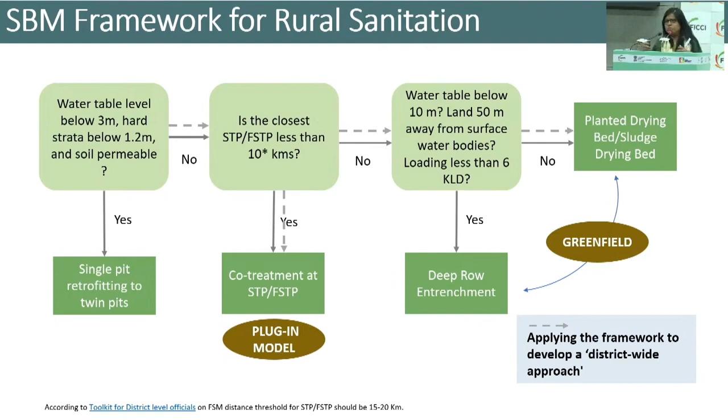The right side is the greenfield area where you have to build something new, while the left side is where you can have these tag-in or plug-in models where infrastructure already exists, so you can do it without spending too much on new infrastructure. When we were working in Odisha, there was this question: why do you need FSM in rural areas - twin pits exist, so there's no need for it. But we found that even in districts which claim there is no need, you still need a very clear strategy based on whether the water table is high or low. If you have a high water table, like we heard from our previous panelists, you still need FSM.

When there is a water table which is below, then you may go for twin pit. If there is dominance of twin pit, it's okay, they are considered safe if they are built properly. But we have found issues with the twin pits also.

High single pits can be retrofitted. But if there are septic tanks, you have to go for FSM. So that's the case of FSM. If you hear why rural needs FSM, you should just remember this slide.

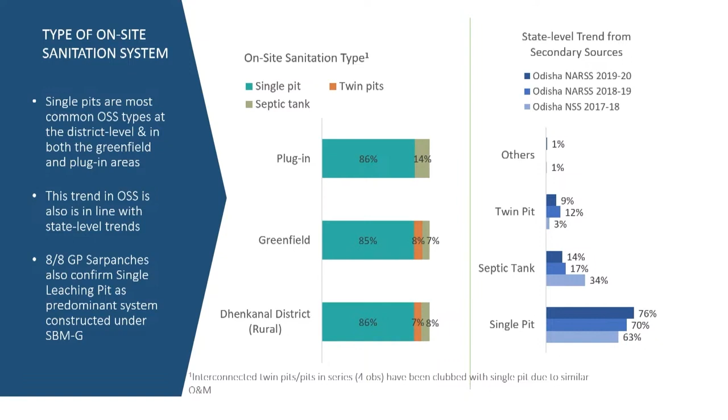It was not twin pit. So we challenged the government there that it is not twin pit, it's actually single pit, therefore FSM is required, followed by septic tanks and very few twin pits. Twin pits actually started growing only after 2018. Before that, it was always single pits being constructed in the fewer localities.

On retrofitting, not many people were aware and they did not want to spend money on that. So this survey was very important for the government to realize that this whole idea of 'rural mein zarurat nahi hai' (there's no need in rural areas) was actually completely challenged.

On desludging providers, we found that municipal service providers and private cesspool operators were there. People were relying heavily on manual labor, which is of course a bad practice, but still we found poor people were doing that. And in any case it cost a lot too - it wasn't actually feasible.

And which are the retrofitting and greenfield areas, where you have to either go for retrofitting or have new FSTP, or low cost or affordable, where it won't be viable financially for the truck to go so far, even considering the topography. So all that we did.

Also seeing in our case, in our urban FSM, how the utilization of the plant was, what was the average. We need to do all the calculations - you can't just go and build something without taking a full-fledged picture. So we did all that, and our decision was that if you have to estimate spare capacity...

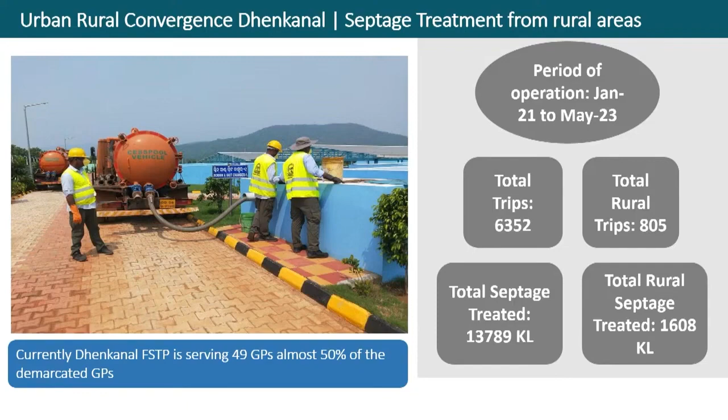And I'm glad to share - this is May '23 data, so since then a lot must have changed - but total trips from rural areas have increased. The total rural septage was 1608 KL, which was huge because there was a lot of work done on the demand side, awareness building, and all that.

And this initiative has gotten a lot of recognition. The Dhenkanal municipality has also gotten the FICCI award - we at CPR got it last December - and there were many attractions from the government, even at the national level. Lots of state governments have already visited to study this model.

Soon after that, we scaled up this model because it was picked up and got a lot of traction. So with UNICEF support, this was taken up by us with the government. What is an enabler is that you need very strong political will at the state level, and we gladly had that - the chief minister and both ministries worked together with regular reviews and all that.

One important thing happened - for the first time in the history of India, as far as I know, any waste management project or program where SBM Grameen - or if not SBM earlier - I did not come across any program which funded SBM Urban. So SBM Grameen funds are being utilized by SBM Urban in Odisha to upgrade their system, because now rural sludge is coming, so you have to improve the fleet and add more drying beds to your FSTP. So all that is being done.

So this was a very unique model. And when we were here, we presented this to Vini Mahajan, Madam Secretary, and she went there also from the Ministry to see this in Odisha.

So just like how you decentralize the nature-based low technology solution O&M by the community - Odisha is also one state which is employing self-help groups to take up O&M. So it's not a private thing - it's very low cost and very easily operatable.

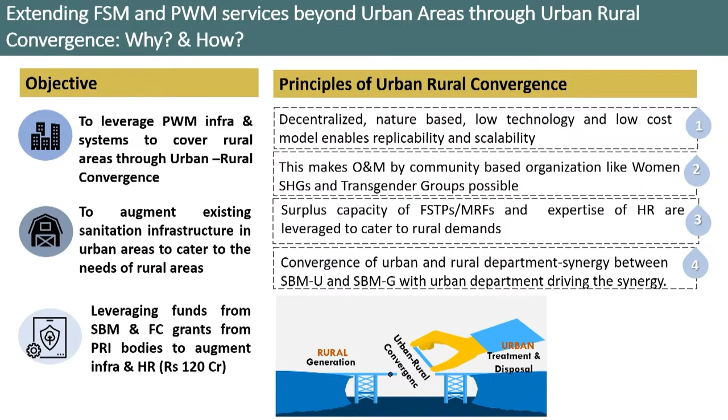And there are surplus capacities of FSTPs and MRFs - I forgot to mention that in the second phase, it was not just FSM but also MRFs. But since this session is on FSM, I'm only focusing there. This was about how rural waste was also being catered to here, so I'm not going into detail.

Just that you need to have a proper model based on who are your providers, where the call center is, how the call center will work, how complaints from panchayats will come, and whether the call center will cater to it with a register. So the data has been captured because they are very proficient and skilled call centers, mobilizing vehicle movement - where to go, where's the demand, and whom to cater to.

And what is also happening is that a strong monitoring and evaluation system is generated. Safa app is a kind of application used by Ganjam, because that was very specific to Ganjam at that point of time.

When we were scaling up from Dhenkanal to other areas in Ganjam, we found they were using the Safa app to monitor, but that was only for urban. Through this program, we integrated rural also, so all rural demands are coming in and being properly managed. Dashboards are generated where secretaries and departments can see. There's a lot of focus on monitoring because otherwise every hard work can just fall through the cracks with no data.

If somebody wants to know how much sludge these plants are treating, we did a lot of capacity building and awareness generation. Some very innovative interactive communication materials in English and Odia are available on how Gram Panchayats have to manage fecal sludge and what options they have, in very lucid, comprehensible language so people can understand. A lot of awareness happened.

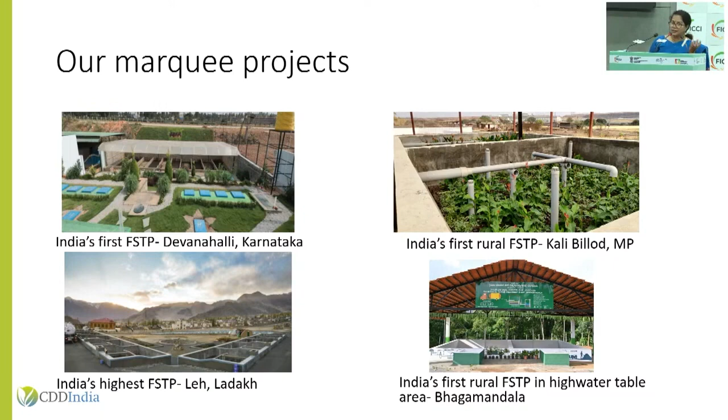Before I start, I would like to highlight some of our marquee projects which were instrumental in us learning new things and trying to take these learnings to scale. Whether it was India's first urban-level town FSTP, the highest FSTP, or the first rural FSTP, we also had a unique case of a village at the confluence of the Kaveri, with a high water table and yearly flooding, where we had to set up an FSTP. These were challenging, with a lot of problems and blockages along the way.

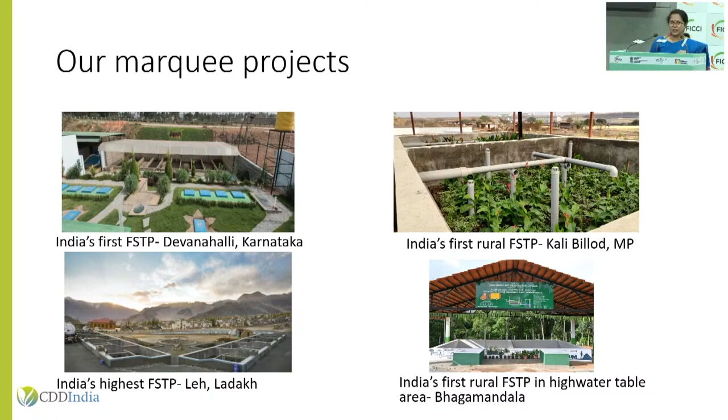But these have also given us a lot of insights into what can be improved as we move ahead, so I'll try to focus on those things. I won't delve too much into why this is really important, or why we speak so much about FSM or about grey water today.

This is not just the issue of Swachh Bharat Mission as a scheme or government program, but links to a larger issue. We are speaking of water stress and water security issues today, we are talking about climate change. And what we are doing at a small level is also going to contribute in a positive way to the larger issues that we are facing as a planet.

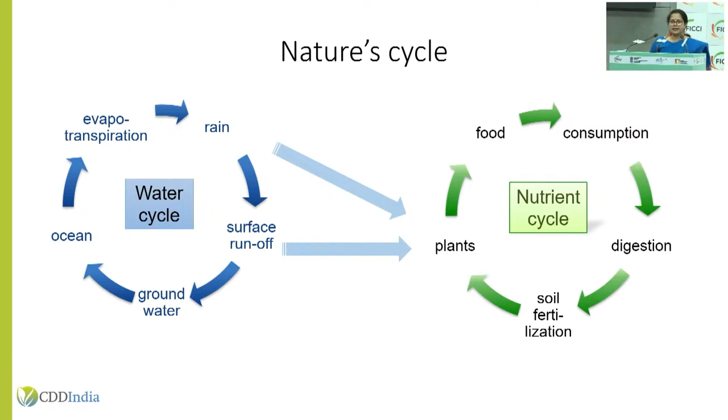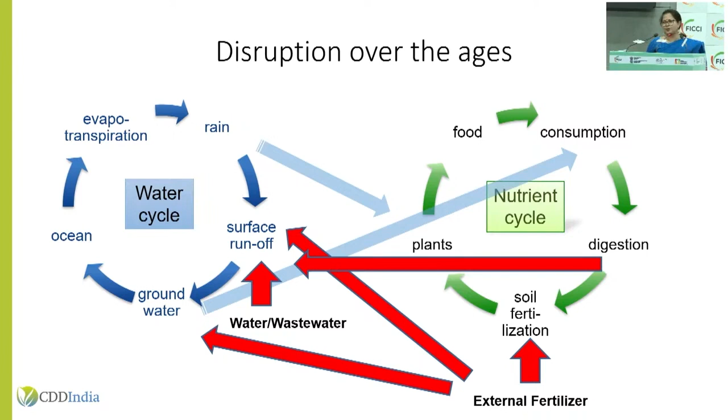We did have a water and nutrient cycle which over the years we have disrupted for all the wrong reasons. We started abusing our surface water bodies, discharging a lot of untreated wastewater into it. We started going for chemical fertilizers instead of organic ones, and all those runoffs are also ending up in our water bodies. Since the surface water bodies are so polluted, we are then sucking out water from the underground aquifers, which has added not only to stress of water availability but also to a lot of pollution.

That's the reason we need to be so much on our toes to tackle this issue. We are not speaking of an issue just at a village or district level, but at a country level, so the scale is huge. To achieve this kind of scale, even a room full of people wouldn't have been sufficient. We need many more people from across districts, across states, and across all stakeholder groups to work with us.

So I'll try to put these into 4-5 questions we started asking ourselves: what should be our strategy, how should we go about it, who should be the people doing it, and when. The when is also equally necessary, because this was in discussion with the Rural Drinking Water and Sanitation Department in Karnataka, and for them the targets were also equally important. I'm sure the government officials sitting here would agree with me.

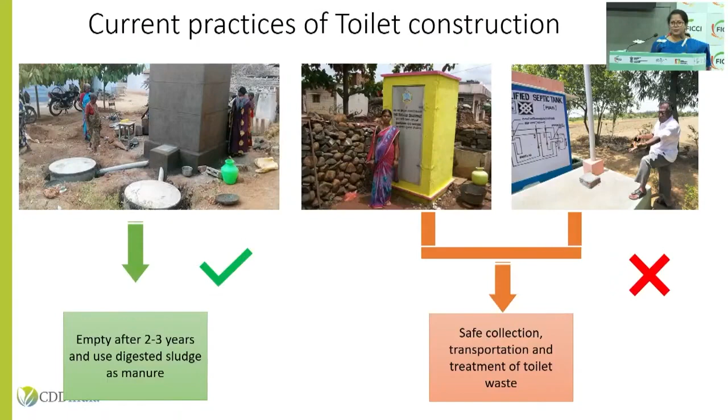I'll go one by one and make it as quick as possible. I'll not delve too much into why FSM is required - of course our toilets have not been constructed the way they had to be, and this is what we had been facing for some time. I can't say that now, luckily, because there have been a lot of efforts across many states. We have Odisha showing us the way, not only in technical issues but also administrative, finance, and social impacts.

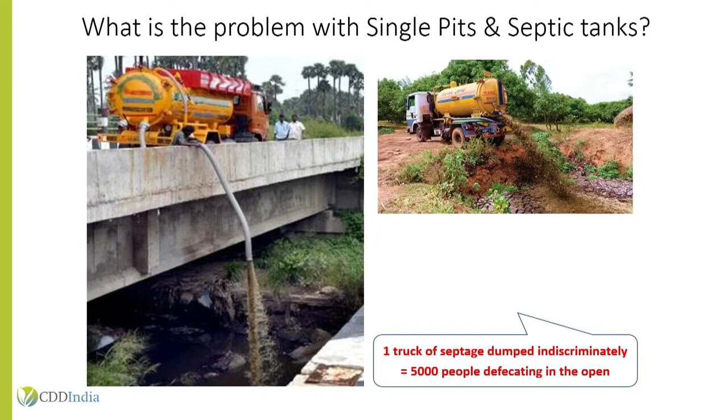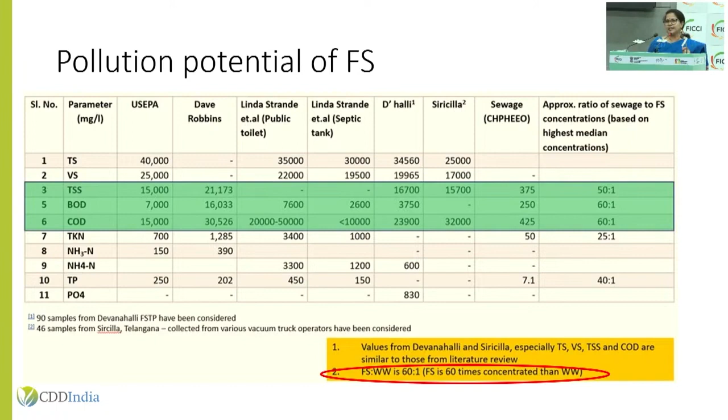This was just to create an image of the scale of pollution we cause by discharging untreated human waste or fecal sludge into water bodies - equal to 5,000 people going out in the open, relieving themselves. This is also to highlight why we delve so much into fecal sludge because of the pollution potential. You can focus on the last column which shows how many times more polluting it is than normal sewage or even grey water.

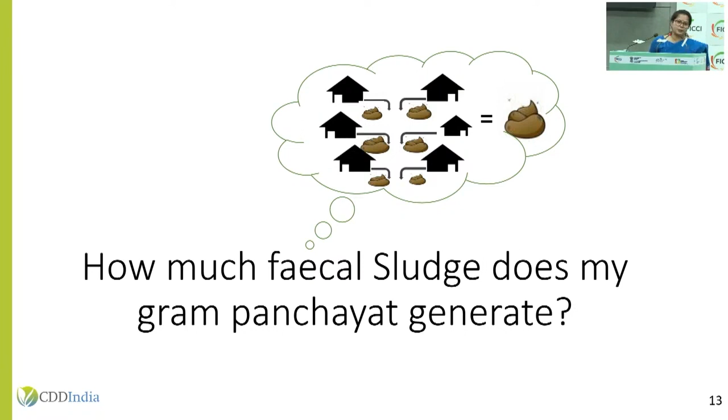Our first question was, when we go at a Gram Panchayat level, when we started with the first cluster, is it really required at a Gram Panchayat level? Not really, because we know we don't get so much sludge - the practices are quite different from the urban counterparts. That's why we had to do exercises using scientific projection methods, whether in terms of population or desludging practices themselves.

Over the first few projects we were convinced that nothing matters as much as practical learnings. We might have scientific ways of assessing capacities and modules, but what eventually makes it work or break is how it is maintained and managed, and it has to be as simple as possible. The simpler the system, the better it is managed - that was the ethos we really followed.

One of our ex-commissioner's favorite statements used to be: just make it idiot-proof. Even if an idiot is put on a job - I know it sounds a little regressive - anyone who just doesn't know anything can also not mess up the system. So our effort was to keep it as simple as possible. Yeah, approaches were different compared to the urban counterparts.

Firstly, we saw across our different geographies and geoclimatic conditions, the kind of developments in rural areas - the old containment systems were large, as large as a room size in some places we've seen. So they really didn't worry about emptying.

When we would ask them why it's room-sized and the opening would have been given in the hall, right in the middle of the house, they'll say, no, we never worried because we didn't empty it. So, of course, in the recent toilets that have been constructed, they are feeling the pinch after the first 3 or 4 years because they need emptying.

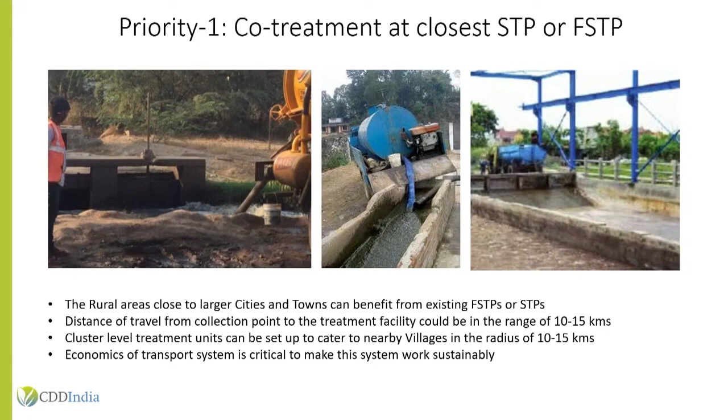So co-treatment as the first option at the nearest either urban STP or FSTP. But also we help them understand in what condition the STP should be used for co-treatment based on its technology, its current usage, its current utilization percentage, and the distance from the villages.

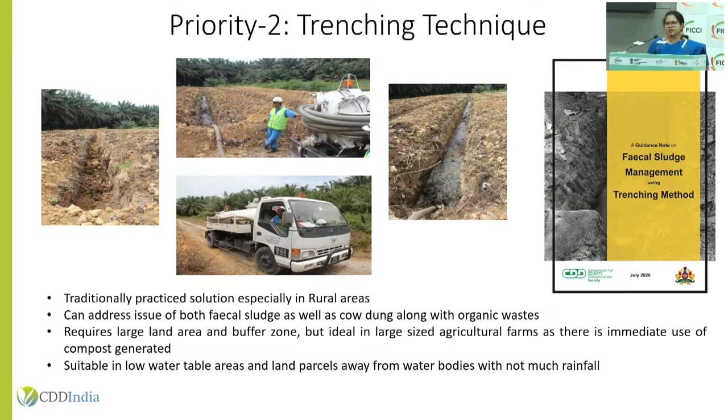Second, of course, was trenching. But instead of the regular conventional trenching where people had challenges finding the ideal kind of site, we said, why don't you do an alternate trenching? We made a guideline saying that you take a 30 by 20 meter plot, and in that you can do alternate trenching by making trapezoidal rectangular trenches instead of the row trenches. So that is another easy option we provided.

In terms of technologies, over the past decade we've seen many newer technologies being implemented in fecal sludge treatment as well. But we try to bucket them, for ease of understanding, into active and passive ones. Active ones are usually conventionally, as Sir had earlier said, highly engineered. They would be suitable maybe in certain places where the ULBs or the PRIs can afford them, and where there's a lack of space availability, and there is enough electricity and enough human resources to manage it.

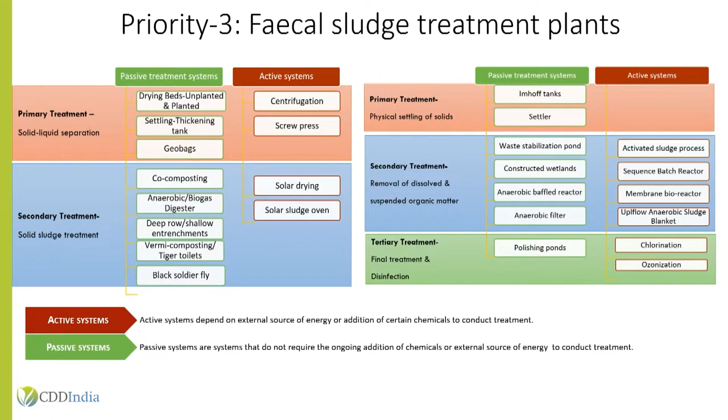So in these cases, maybe the conventional could be tried, but in rural areas, largely we are going for passive systems. These are nature-based systems which require very little maintenance, and if you site them in the solid waste treatment facility area itself, it becomes easier. That's how we've tried to reduce operating costs also in some cases, by utilizing the same team and training them to operate these plants.

As per the guidelines, we have stuck to the first two largely across the state, whether it's planted drying beds or unplanted drying beds. We have also given certain guidelines to the district officials along with the training saying if you have to select a technology, please don't be limited to just the ones that are already running on ground. Because the usual government statement would be that I want to do something that's already working, I don't want to take the risk of something new.

So in that case, it is okay to take new risks with new technologies, but certain questions should be answered: what is my intent for treatment? Is there any end use or reuse option that I have available? What are the resources available with me? And lastly, what is the input quality and quantity? That also matters even in fecal sludge treatment.

I'll just quickly go through the reuse potential, because our general assumption is that when it's rural, you can just use it for agriculture or horticulture or whatever. But we've also seen certain villages, especially peri-urban ones, which didn't have much uptake for reuse. They came back saying, no, we don't really want to do this because it's adding a burden on us to figure out what to do with the treated sludge and the additional water being generated. Though these are small quantities, they could largely use it in their own landscaping. But again, it set us thinking that we should not limit reuse to just a certain kind in rural areas. So next is the how.

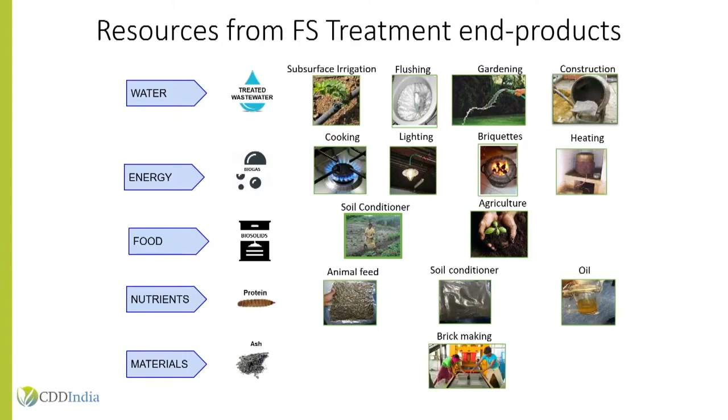Really, how did we go about? We have just 2 minutes for you. I'm so, 2 minutes and we're done.

Don't worry, so as to the how, I just wanted to say that the state has come a long way, whether it's in terms of policy formulation, or the guideline documents we prepared. The general tendency in scale-up is to just copy whatever is being done and replicate it. We said no, this will not work. We even prepared technical workbooks, template documents, and trained engineers. Luckily in Karnataka, we had the Panchayat Raj department having responsibility under one official for both NREGA as well as SBM.

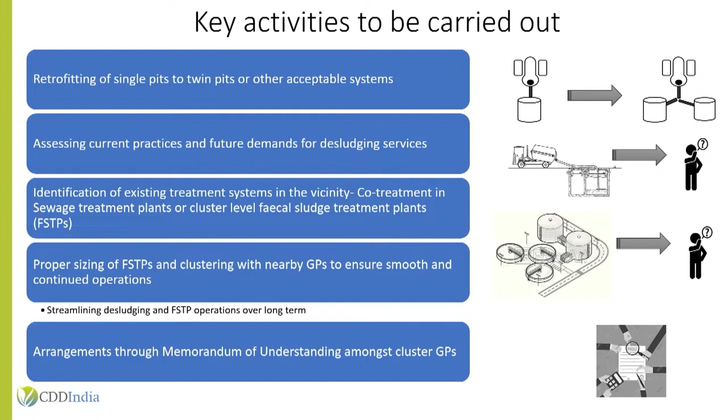That worked in our favor because we could sit and plan out many activities where there could be convergence of funds, and that's how work happened faster. In terms of technical support, training and capacity building, we provided about 3 years of service in technical handholding, which we felt was essential. You can't just suddenly provide a service and exit out of it. So we tapered it down — first we were full-fledged, did pilots, did training, provided a 2-3 person team just to help them out. And now we've exited, and the state is going ahead with implementation.

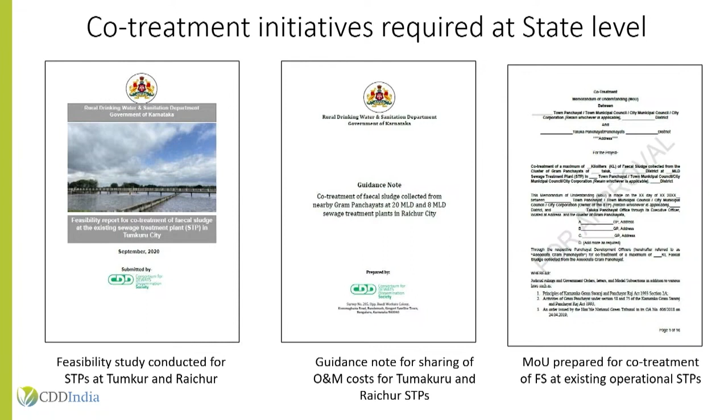So making it up and running, there are a lot of excellent examples we've discussed — using SHGs, using the existing solid waste management facility team and training them to operate these FSTPs. That's how we've been able to scale up. We've used a lot of GIS maps to identify locations and cluster the villages around. A lot has been done at the state level, and then it's been passed on to the district level authorities to take it up from there.

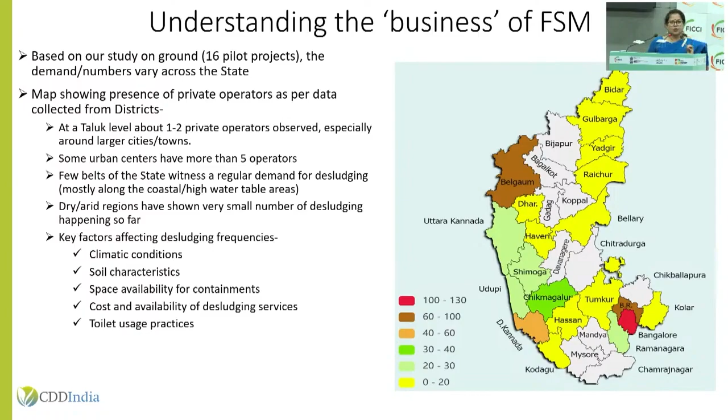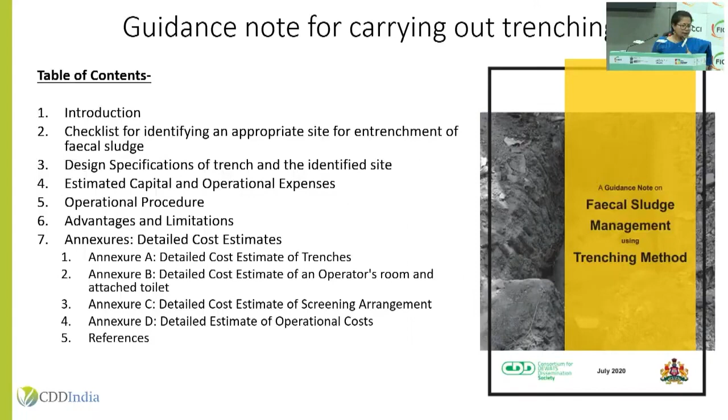One important challenge we still face is understanding the business of FSM — and when I speak of business, it's about the desludging business. We're trying to address not just government vehicles, how to manage and run them and at least break even if not make profits, but also small-time private desludging operators and how to bring them into the fold. Many other states have used systems of licensing and empaneling, and that process is still on in Karnataka. We intend to take that up and make it a more well-formed system.

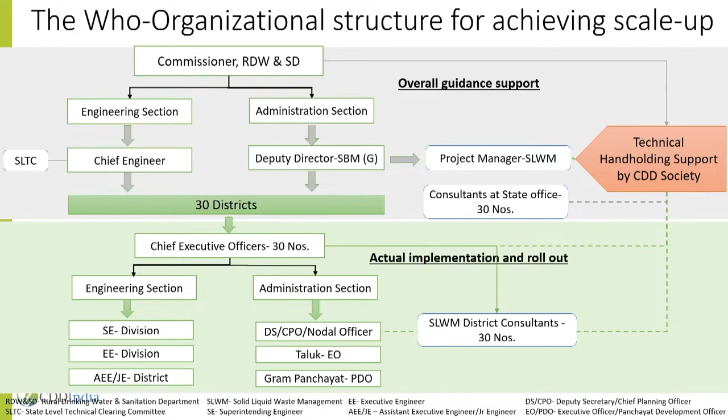The state team also developed a panel of people from media organizations and got videos done from the district levels itself. Simple Gram Panchayat teams came and prepared videos, and there was a lot of pride in them knowing their messages were going out to everyone.

There are a lot of aspirations to do whatever the urban counterparts are doing. We've had many villages on the peripheries of large cities who come to us and say, we had money, we put up a UGD, now please help us with a treatment system, but we don't have money for it. So we're trying to figure out ways to even work with such situations, because even they need a solution at the end of the day. So that's about it. I hope I've not exceeded my time, and happy to take any questions either now or later on. Thank you very much, everyone.

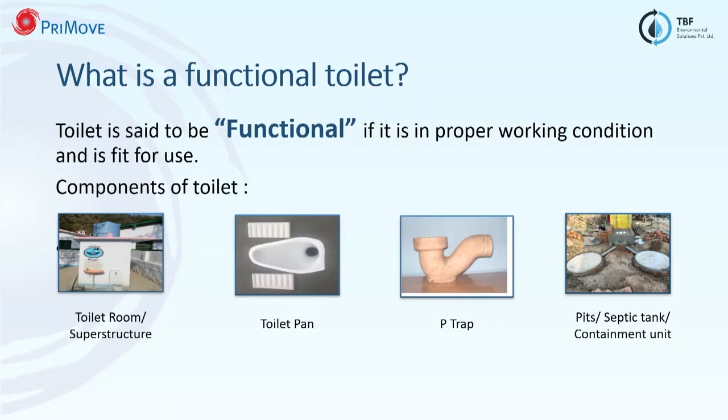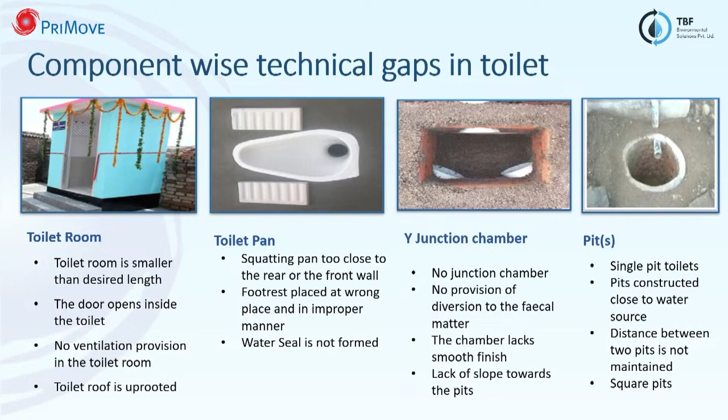We have spoken enough about toilets and their functionality. The thing is, in the haste of achieving the ODF free status, we undertook toilet construction at a massive scale and missed out a few points. And that is why we require retrofitting at a higher level than that would have been expected. There are multiple components in the toilet that are found to be non-functional or not functioning up to the mark because of certain points that either were missed, as sir said, that the trainings took place later and the program had proceeded by that time, or generally lack of technical know-how, or trying to find a solution that is like one fits all. We know that our nation is very diverse, and therefore we cannot have one fits all kind of a solution. So yes, there are issues with the toilet rooms, pits, and all the components of a toilet.

I wouldn't want to focus on all the components, but pits is one thing that I would like to take up. Usually there are single pit toilets that have been built up at multiple locations. Also, there are single pit toilets that are built in locations where the soils have low permeability or the water table is really high. In such considerations, when the permeability of soil is low, the water does not get out and percolation does not happen, so the decomposition time is really high. In cases where the water table is really high, there is a good chance of contamination.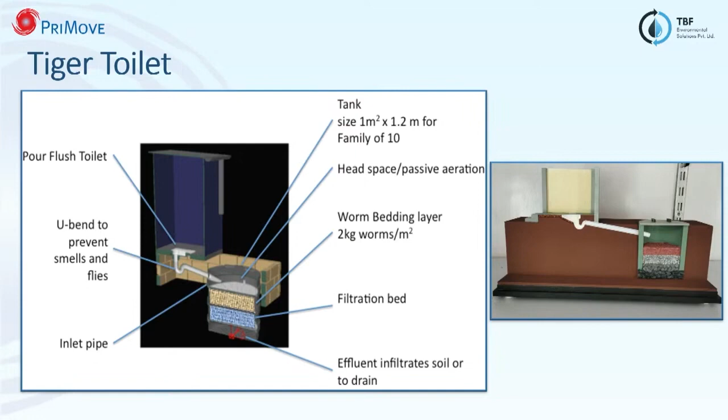So there is one option called tiger toilet, which can be utilized in such cases, where earthworms are utilized for digestion of fecal sludge. As you can see in the picture here, down there we provide a gravel layer above which a biomedia is placed, which is basically a mixture of coconut husk and cow dung. On top of that, earthworms, a specific species known as tiger worms, are loaded. The fecal matter falls in the center of the pit, wherein the earthworms come, consume the fecal matter, and as they move aside, they convert the fecal matter into vermicompost, which is then accumulated along the periphery of the tank. So at any point of time, we really do not have to deal with the fecal sludge, and also we do not have to wait for the whole tank to be emptied. Also, if there is a water table which is really high, the water that gets down the gravel layer is treated, and there is very low to nominal risk of water contamination. In case the soil is not permeable or semi-permeable, then we can always channelize the water outside to nearby drains, whatever is possible. So this is just a diagram and some of the positive points of having tiger toilets.

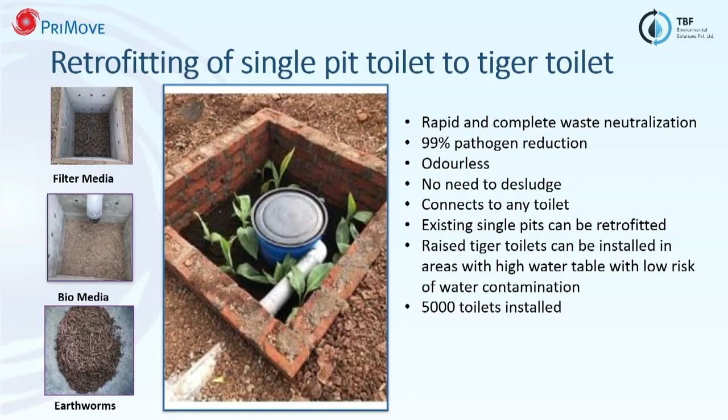These are found to be very useful in remote areas where there are also multiple excavations, or sending teams for multiple times for construction is not really possible. In those locations, we tried having tiger toilets, which are performing really well. Also, we have tried some raised tiger toilets in areas which have high water table. So such are the locations where tiger toilets can be used.

Now, septic tanks - I would like to focus a bit on the points that we should take care of. People have really gone far with their imagination in construction of septic tanks. The septic tanks everywhere are not really watertight structures. They have honeycombed walls, or not really a base slab, or things like that. And then you really do not know what to do about it. So the first thing is we really need to retrofit it. When we call something a septic tank, we have to have a septic tank which is watertight as per the design of IS 2470. And then if that is ensured, at least we can desludge it and have a septic management system.

If we have something in between a septic tank and a twin pit toilet, we'll never figure out how to go about it. So that is one thing that I would want to focus on here.

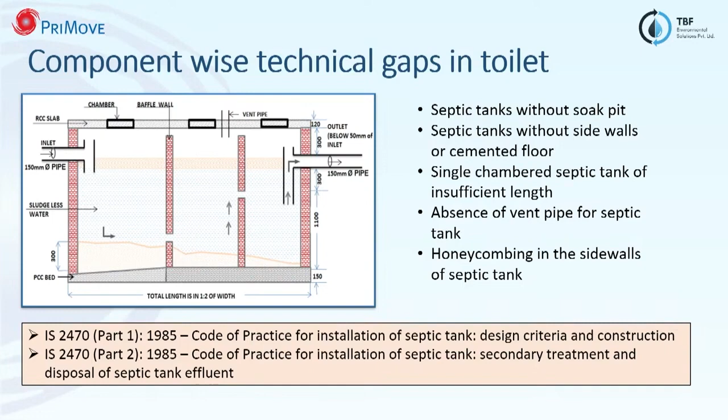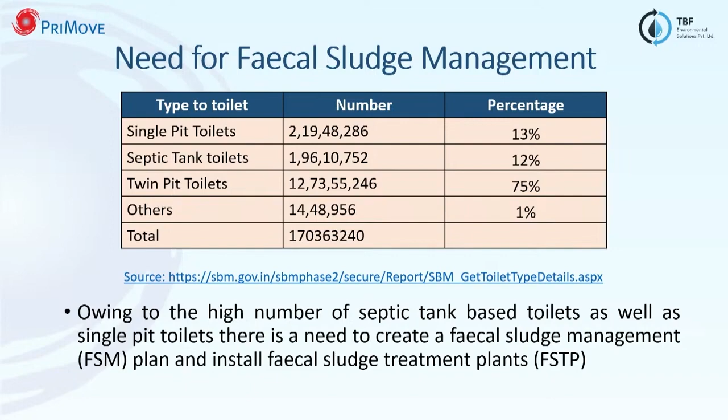Now, even if you look at the percentages—this is data I took yesterday from the Swachh Bharat Mission dashboard—the percentage might look really small, that only 12 to 13% of toilets are single pit and septic tank. However, if you look at the numbers, they are really high. So that gives us, as Anju ma'am was mentioning, a definite need for a fecal sludge management system and fecal sludge treatment plants.

What fecal sludge management is has been sufficiently discussed, so I wouldn't want to repeat it. There are certain things about the fecal sludge management chain, however, which have not been given enough focus.

Firstly, the containment unit. If we are saying the containment unit, it has to contain things sufficiently so that it can be desludged at least—the material should be pumpable at least.

Then, when we come to emptying and transportation, this business is not really organized. There are a few malpractices going on, and we need some kind of licensing, like ma'am spoke about, that needs to be done. This needs to be converted into an organized industry so that both the people involved in the industry and the household owners can benefit from it.

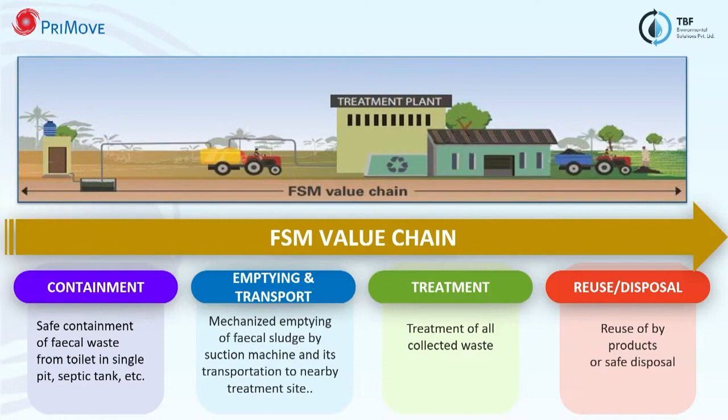About the treatment, there is quite a need for treatment. And last but not the least, people are not really aware of what can be done with the byproducts created from the treatment.

So these are some of the issues. People are not aware about septic tanks—as ma'am mentioned, now they are somewhere figuring out that yes, it needs desludging, or sometimes it is used in such a way that it will never need desludging. But either way, it is a wrong practice. So massive IEC on this needs to be undertaken.

Lack of services, lack of treatment facilities, and lack of knowledge about what can be done with byproducts are major challenges that need IEC, but IEC alone is not sufficient. We also need infrastructure so that we start walking from both ends, so that somewhere the paths will meet, with a positive hope that we will meet up.

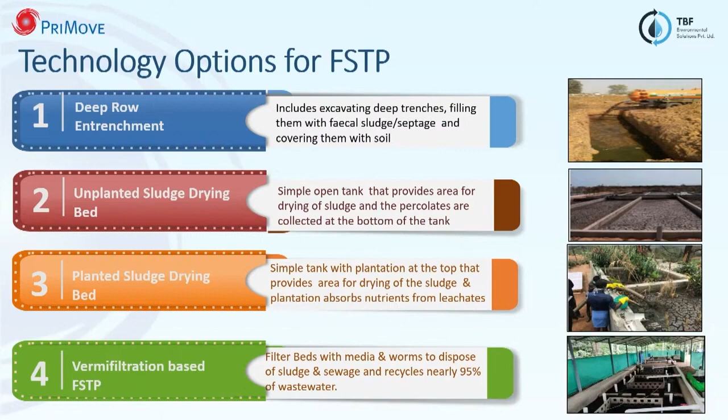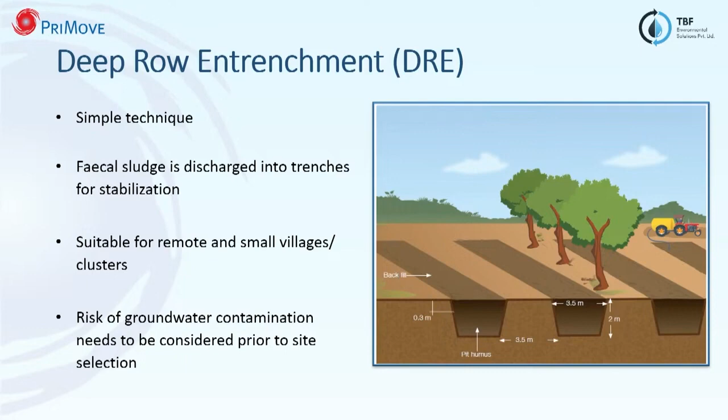So these are simple technologies that can be used. Most of them have already been discussed by both speakers earlier. I would just like to focus on some points: deep row entrenchment, while typically very simple, is also area intensive. And if the land available is not selected properly, it can have a risk of water contamination, just like the pit system does when the water table is high.

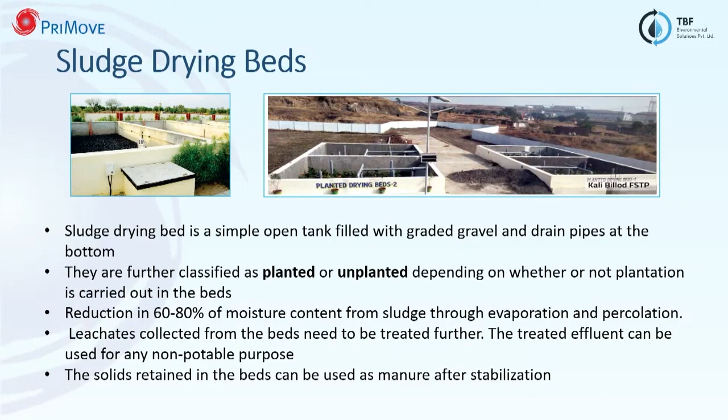Then coming to sludge drying beds—these specifically provide solid-liquid separation, and then both the leachate and the sludge need to be stabilized. The leachate needs to be treated, and then both byproducts can be used, as the treated effluent can be used for non-potable purposes like agriculture, landscaping, or others. If there is a chemical industry nearby, maybe that can be utilized, and the manure can be used in farms.

Now, coming to vermi-based treatment, basically it uses earthworms and a consortium of earthworms and other bacteria. It's known that the gut of an earthworm contains quite a variety of bacteria, and it is not restricted that if an earthworm is working, the other microbes won't work. So it is the whole ecosystem in the tank that works on the fecal matter, and as a result the fecal matter is digested, stabilized, and vermicompost is formed out of it.

But since we are putting the fecal matter in to be consumed by earthworms, one thing about earthworms is that they cannot sustain flash loading. Therefore, if anaerobic digestion is given prior to that, the flash loading is avoided. Earlier in some presentation we saw that the range of fecal sludge is from 10K to 50K—that is quite a lot of variation for any microbe to digest, and specifically for earthworms. They are really efficient, but they have their own concerns. So long as we are very friendly with them, they are very friendly with us. But we have to make sure they are not flash loaded.

And then the organics are converted into vermicompost. Unlike planted or unplanted sludge drying beds, there is no separate time required for sludge digestion or stabilization. The process goes on continuously. The vermicompost is usually accumulated along the periphery of the tank, whereas the fecal sludge is discharged at the center of the tank. So with simple safety gear like gloves and mask, any person can just take off the vermicompost and the tank is good to go. So there's no need to completely desludge the tank at any point of time.

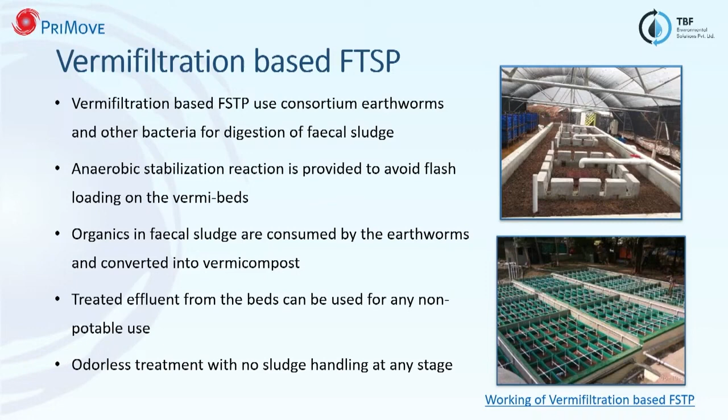It is then loaded over a vermibed filter. This typical one is of the Tiger biofilters, which is a patented technology formed by Primove and is now implemented by TBF Environmental Solutions. So TBF bed 1 is the place where fecal sludge is discharged. The liquid components go down the gravel media, and the solids are retained at the upper portion. The composition is very similar to that of a Tiger toilet digester.

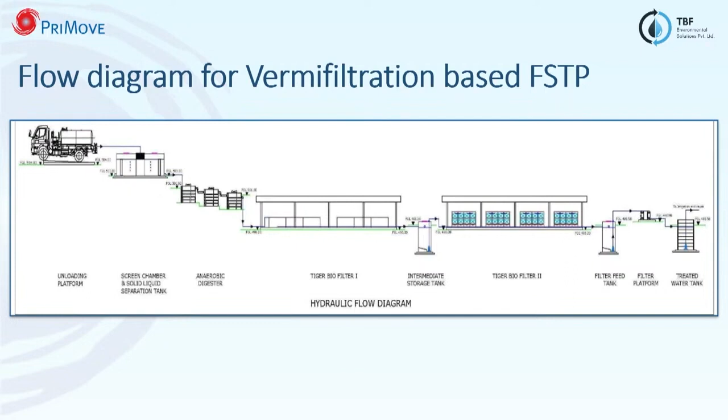At the lower half we have gravel media, then biomedia loaded with earthworms. So the liquid portion passes through the gravel media and is collected in a tank. It is then loaded over the TBF2 tank, where again the earthworms act upon the organics and clear water is discharged out. It is then polished and disinfected, and this water can be used for any non-potable purpose. In both tanks, we get vermicompost at the periphery of the tank, which can be used for agricultural purposes.

We also have seen the importance of co-treatment, and one such co-treatment plant is working in Malkapur in Satara district of Maharashtra, where the initial STP was constructed based on MBBR technology. The town has quite a lot of septic tanks, and nearby gram panchayats are also now discharging into the same plant. So fortunately, we had space enough that we could install this plant.

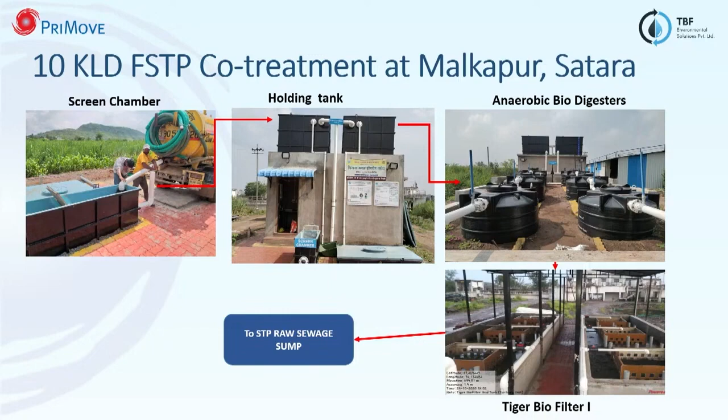Firstly, the fecal sludge is unloaded into the screen chamber, which is then transported to the holding tank. Now, because of the space crunch, we have to have a pumping system. If we are benefited by the terrain and space availability, we can always go for a gravity-based system. It is then sent to the anaerobic digester, followed by TBF filters, and then the effluent that comes out from the TBF1 filters is now loaded into the raw sewage sump of the existing STP. So this is one example of co-treatment.

We have a number of plants in various districts like Kerala, UP, Maharashtra, and we are planning a few in West Bengal as well. So this is one of the outlet parameters that have been monitored at the Kalpetta plant, which is in Kerala. As you can see, the BOD was monitored since the plant was commissioned in 2019. After a month or two, when the whole of the biological activity was fully set into the system, you can see that the BOD content is well within the limits.

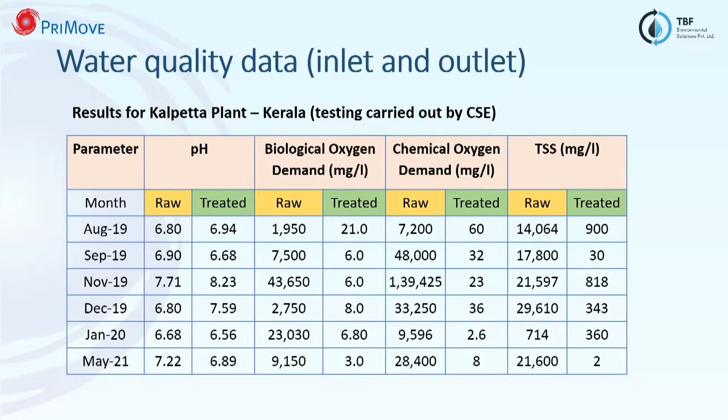The NGT limit is 10 mg per liter, and we are having something like 6 to 8. The recent result that I saw was from 21st August 2023, which gave a BOD value as low as 2 mg per liter. So almost potable. This is also proven by the Mashelkar committee and is included in the CPHEO manual.

These are the projects that we have already completed. As you can see, we have a few plants in various states, and we have a few going on. The technology is not very much dependent on terrain or climate. You don't have to really tweak a lot with the technology depending on climate variation. The earthworms are friendly enough, as I mentioned, that it is only about the retention time that needs to be changed depending on the temperature variation. The earthworms have sustained really well without any feed for a period of up to 2 to 3 months.

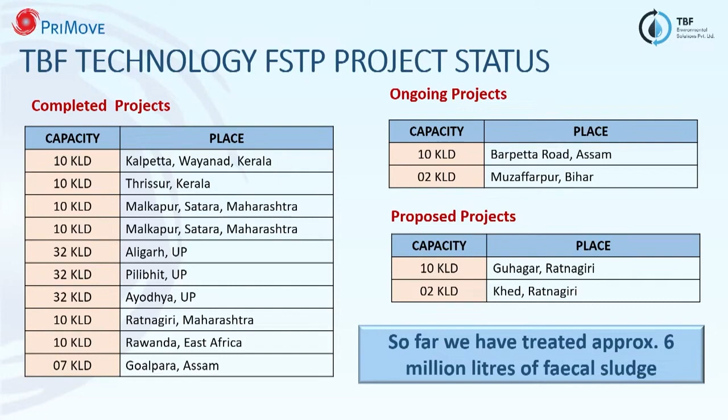The only concern is that the plant at any point of time cannot go under submersion. If the plant is submerged, if the TBF filter is submerged, then there is a risk. But during the site selection itself, we make it a point that the plant is always above the HFL. So none of the plants as of now have ever failed, and this is one nature-based good option, I guess, that can be utilized. So with this, I'll end my presentation. Thank you, I'll be up for questions.